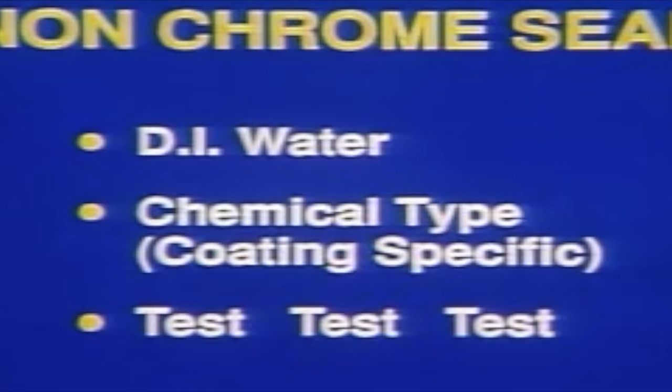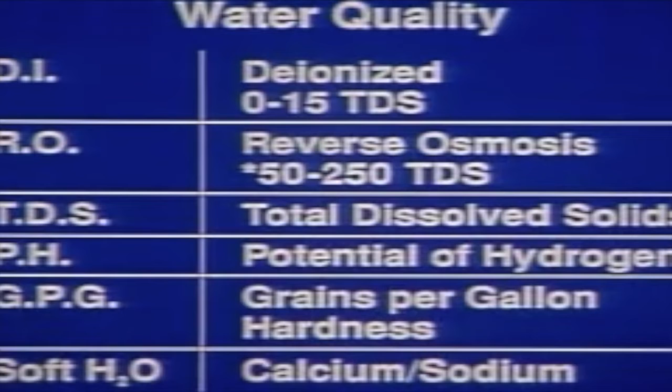You also need to review material safety data sheets to assure that other restricted materials have not been substituted for chrome. While none of the available non-chrome seal rinses can compare across the board to chrome for underfilm corrosion protection, deionized water has shown to be a good alternative in many cases. We would encourage the testing of deionized water whenever you are evaluating your pretreatment process. In the pretreatment and surface preparation, there are several steps that can be taken to improve the performance of your system while lessening the environmental control costs associated with waste disposal.

There are many different types of soils used in a manufacturing facility. We often overlook or assume that all soils will be easily cleaned. The cleaning operation would be less difficult if we understood more completely all the individual soils, which are generally shop dirt, smut, oil, metal chips, and drawing, stamping, and buffing compounds. Upon completion of a soil audit and the determination of a suitable cleaner, every effort should be made not to introduce new soils without pre-testing.

Soils can be classified as organic soils, which are oily, waxy films such as mill oils, rust inhibitors, coolants, lubricants, and drawing compounds. These are classified as organic soils. Alkaline cleaners clean organic soils. The other type of soils are inorganic soils. They would include rust, smut, heat scale, and inorganic particulate, abrasives, flux, and shop dust. These inorganic soils are most easily cleaned by acidic cleaners. Acidic cleaners clean inorganic soils.

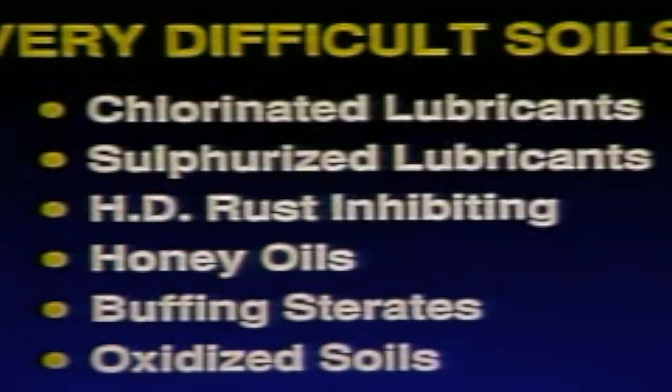All soils fall into three basic categories. There are very difficult soils, such as chlorinated lubricants, sulfurized lubricants, heavy-duty rust-inhibiting compounds, thick heavy oils, buffing compounds and stearates, and oxidized soils. The moderate degree soils would be fatty oils, heavy-duty hydraulic oils, mill oils, lapping compounds, water-displacing rust inhibitors, and those type of oils.

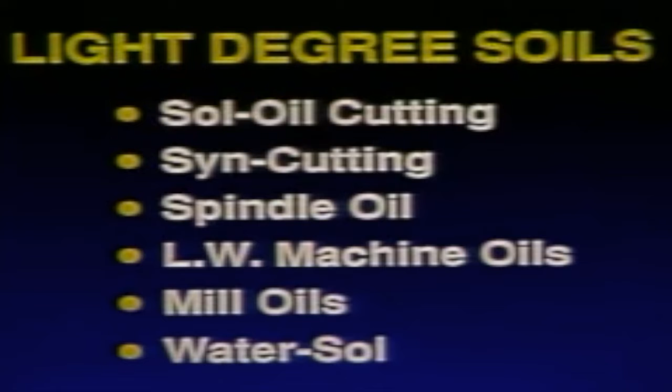Light degree soils, which are more easily cleaned, would include soluble oil, cutting fluids, synthetic cutting fluids, spindle oils, lightweight machine oils, mill oils, water-soluble rust inhibitors, and vanishing oils. The very difficult soils tend to be heat sensitive. Soils falling into the naphthenic, paraffinic, chlorinated paraffin blends, or those containing waxes, are generally heat sensitive to some degree. When you encounter this type of soil, it limits the variable of temperature. A heat-sensitive soil of, let's say, 160 degrees Fahrenheit requires you to adjust your cleaning bath temperature downwards.

Specifically formulated low-temperature cleaners rely on both soil displacement and slight emulsification. The blend of detergent systems built into the low-temperature cleaners are designed to reduce surface tension at the soil-metal interface. This unique factor enables us to remove soils sensitive to heat at a lower temperature, lower than the melting point of the waxes of that soil. This fact also produces less contamination if properly skimmed, resulting in longer cleaning tank life.

Soils with an acidic nature, such as some of the soluble oils and soils containing fatty acids, can create severe foaming problems. The reason being that under heat and in an alkaline system, these fatty acids convert to soap, which overloads the defoaming system when the soil reaches a saturation that exceeds the anti-foam capabilities of the cleaner in solution. Fatty acids plus alkali plus agitation and heat equals soap and foam.

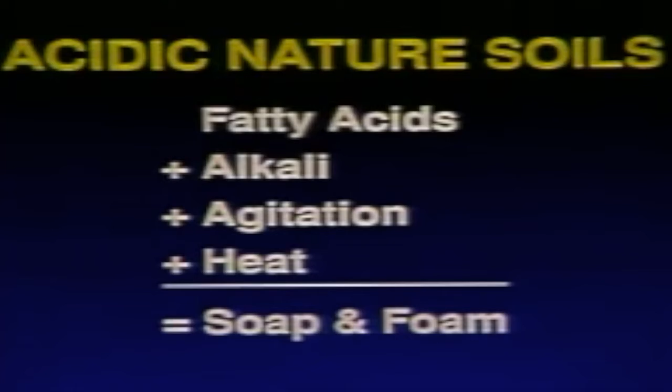When the incoming soil load reaches the particular cleaner's ability to control, this saturation point generally reduces the tank life drastically. If you should encounter these types of soils, you have three alternatives. The first would be to increase the concentration of the cleaner. By increasing the concentration, you increase the defoamer system to combat the increase in soil load. The second alternative would be to raise the temperature of the cleaning bath. By increasing the temperature, you help to increase the insolubility of the defoamer. This causes faster foam deactivation.

The third alternative would be adding more defoamer. The use of a defoamer will combat foam by increasing the ability to control foam at greater concentration. Another step, while not the most advantageous, would be to dump and recharge. That is the last resort. Fresh solution adds additional foam control properties to the bath and obviously will increase the cleaning ability of the bath. However, the most advantageous change you should make would be to change the soil. Evaluate alternatives for that particular soil.

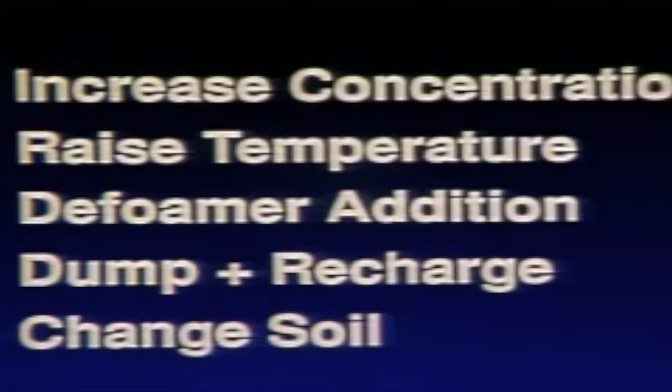Once you've conducted a soil audit, you should then conduct a substrate audit for your plant. The composition or chemistry of the base metal is one of the key limiting factors to cleaner choice. The cleaner must be chosen so as to be compatible with the metal being processed. In multi-metal cleaning lines, non-ferrous metals are typically the limiting factor. With these metals, it is important to choose a cleaner which either does not attack or over-etch the metal, and where the attack is controllable or desirable.

A common mistake by both chemical vendors and manufacturers is that a base metal audit is made for cleaner selection, but not done completely. Yes, it's acknowledged that this line is multi-metal, but no, not all alloys were pre-screened. Most aluminum and zinc alloys with slightly different alloy content can vary widely in the ability to withstand either alkaline or acidic cleaner attack. In some cases, where minute etch is desirable, slightly more or slightly less is unacceptable.

The four basic substrate classifications would be the ferrous metals or iron-bearing metals, which would be cold-rolled steel, hot-rolled steel, stainless steel, and ferrous castings. The typical non-ferrous metals would include aluminum sheet, coil, and castings or extrusions, zinc castings, and galvanized. Tin plate and zinc plate would also fall in that category. The third basic classification would be the yellow metals, which are copper and brass. And fourth, and the one that causes the most problems in cleaning and pretreatment lines, would be the mixed metals, which are combinations of the above.

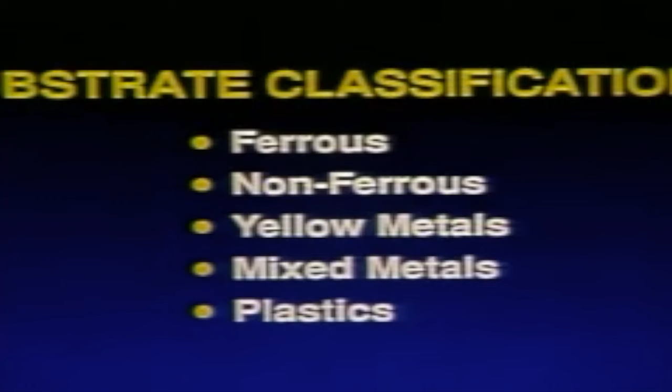The selection of chemicals for cleaning and phosphating or other conversion coating can result in the presence of unacceptable levels of zinc, aluminum, or other sensitive metals in your waste stream. The use of a heavily chelated alkaline cleaner would result in increased difficulty in removing these metals from your waste stream.

Consider counterflowing rinse stages. For example, in a 5-stage iron phosphate pretreatment washer, counterflow stage 4, which is the rinse following the iron phosphate, into stage 2, which is the rinse following the alkaline cleaner. In this arrangement, all of the freshwater makeup is fed into stage 4. The stage 4 overflow serves as the makeup and overflow for stage 2. The result is a 50% reduction in freshwater usage, plus the use of slightly acidic stage 4 water to help reduce alkalinity in stage 2.

As was mentioned earlier, keep tramp oils skimmed off cleaner and rinse stages. This prevents oils from being redeposited on the part and helps prolong bath life. Consider filtration of the cleaning and phosphating baths to reduce sludge and metal fines. This helps keep risers and nozzles from plugging, and it extends the bath life.